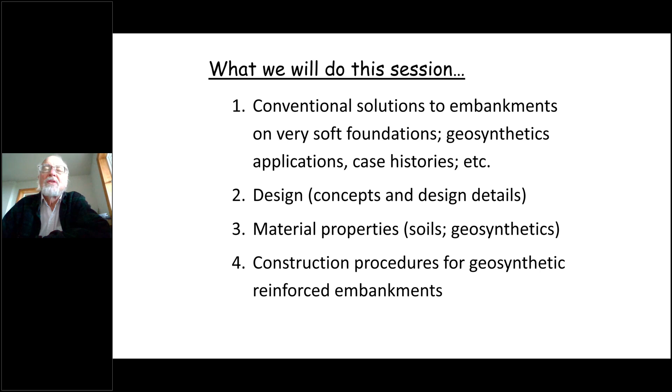We're talking about soft sites that you probably can't walk on - tidal estuaries, dredged retention disposal sites, very recent glacial deposits, and so on. They're all over the world. There are these very soft sites that somebody wants to build something across.

So what did people do historically? Well, in colonial North America, corduroy roads were quite common. The last one I can find was actually constructed in upstate New York in 1927. They cut the trees down, laid them out transverse to the center line, took the limbs off, built the embankment, and it worked beautifully.

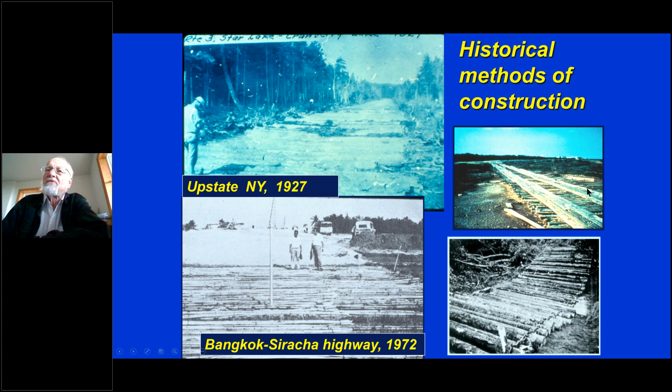These timber logs, or the bamboo poles used in Southeast Asia, all work to distribute the load, spread the load, and reduce the stress on the foundation. Contractors use timber logs or timber mats to walk equipment across soft sites, and plank roads have been used as well.

So conventional solutions are listed here. You can build a bridge. Now, sometimes that doesn't work. If you want to retain dredged spoils, a bridge won't work. Plus, bridges are expensive.

Berms and/or flatter slopes—that's often the case in highway engineering. The first thing engineers try to do is flatten the slope or use berms for an embankment on a soft site. That means you need right-of-way.

Lightweight fill, geofoam, expanded clay, lightweight glass materials—those are all possibilities. Up here in the Pacific Northwest, sawdust and wood chips have been used for a long time to reduce the weight of the embankment on the foundation.

Embankment piles are very common—what they call now pile-supported embankments. Embankment piles were used in Sweden for probably 50 or 60 years for approach embankments to bridges and for support of railways and highways across soft sites.

Excavation and displacement, or replacement with high quality granular fill, is a tried and true method. It's been around since the early days of highway construction in this country.

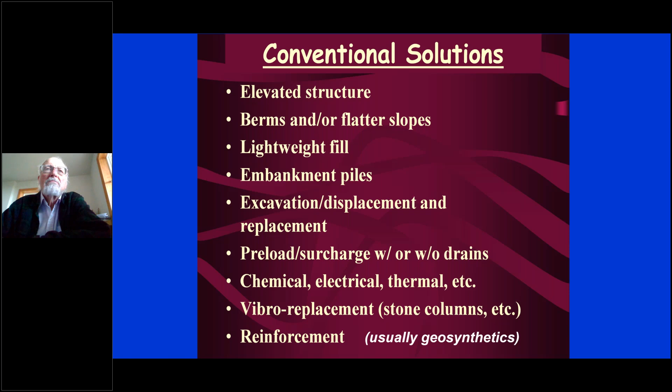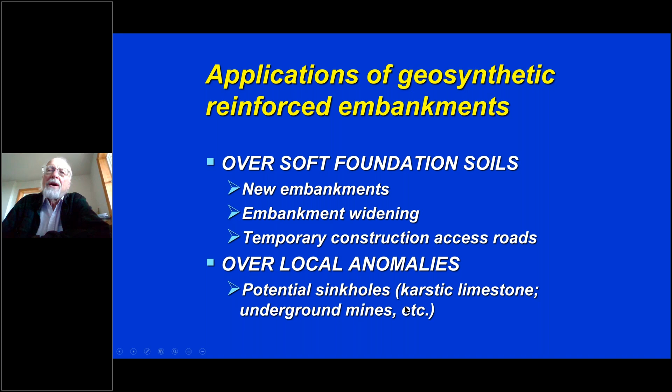And finally, reinforcement—today usually geosynthetics is what we use. Applications of geosynthetic reinforced embankments include new embankments, embankment widening, and temporary construction access roads. Sometimes, to even start construction, you have to reinforce your access road. And then there's use over local anomalies like sinkholes and underground mines.

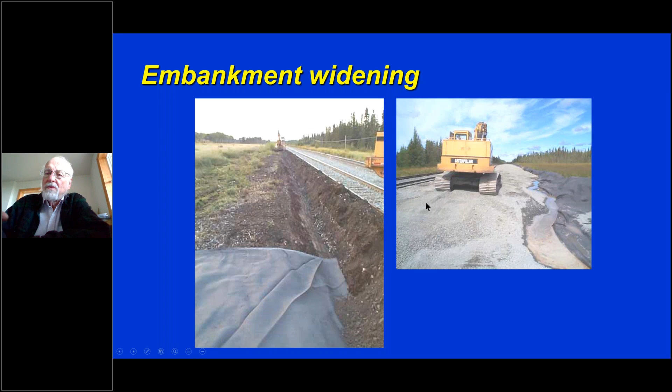Railways, when widening from a single to a double track system, can use geosynthetics very effectively under the new construction. You can see here the geosynthetic, the fill has been put in, and they're ready to lay the track. So what's the purpose of the reinforcement?

Well, it's to prevent instability. There's a little evidence that we may reduce excess vertical and horizontal deformation, but mostly it's to prevent instability. If you don't have a stability problem, you probably don't need a geosynthetic.

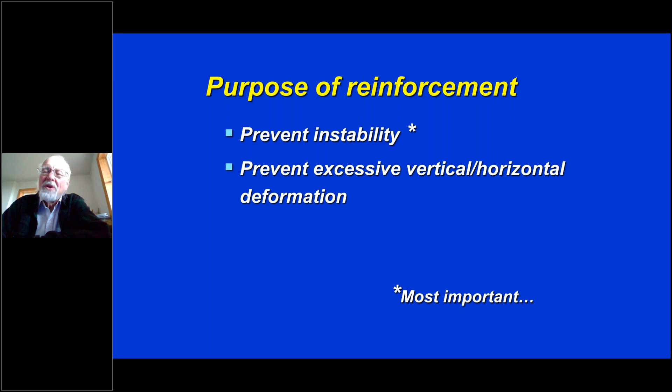Geosynthetics that are used are geotextiles—that's the granddaddy of all the reinforcing systems. Geogrids have been used in the last 25 or 30 years, and PVD drains for foundation soil improvement. Also in there are a lot of geotextile systems like geosynthetic encased columns and so on, which would be in this foundation soil improvement technology list.

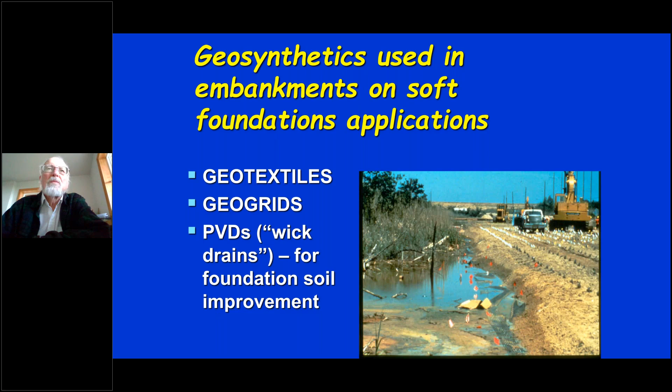Can you design with geosynthetics? Well, that's what we're going to look at now—the case histories that I talked about earlier and the lessons learned.

When they went to investigate the failure, they stuck a settlement gauge down the pipe that they'd put in under the embankment, and it was broken.

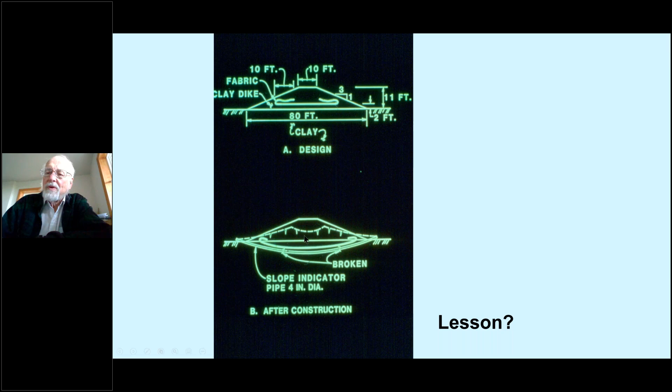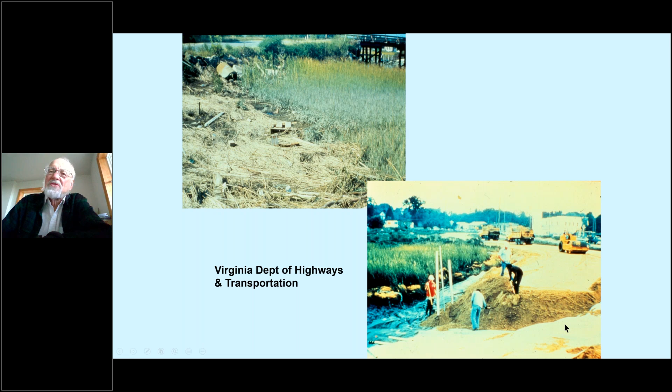Here's another case from the coastal west of Virginia. The Department of Highways was rebuilding this bridge, which had this kind of tidal flat area. You can see the construction here - here's the geotextile. This was back in the early days; they really didn't stretch it out very well, and the lift thickness was very large, but that's all right.

Unfortunately, they got a failure. This sketch below illustrates how it happened. The scarp here is vertical and then goes down. When they dug up the geotextile to see what happened, here's what they found - it had torn. So what did we learn there? It's got to be strong enough. That's the lesson.

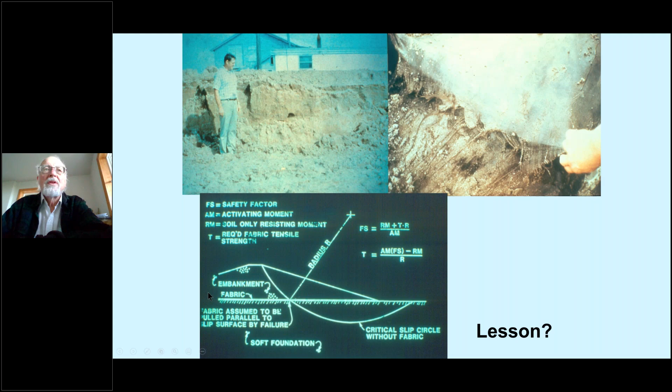We do this calculation and make sure we have sufficient strength in the geotextile at the base of the embankment to take up that calculated stress.

Here's another Corps of Engineers job somewhere in coastal Georgia. Three rolls of geotextile laid out - this is the easiest way to install it, as you can imagine. Go across the swamp in this direction. You can see the dozer blade here; they're already bringing in fill. Here's a roll this way, here's another roll out here in front, and then a third roll.

And yeah, it's a soft site. That's one reason they got the fabric - because they had the failure of that tractor. They came back Monday morning; all failures occur on weekends, of course. Here's the embankment that had settled into the soft soil, and here's a classical bearing capacity failure surface, a Prandtl failure surface.

The Corps of Engineers is great because they tell us what happened. Here's the original design - look at that, the 5-foot high embankment, nothing. And there are the 3 rolls of geosynthetics overlapped. When they went and dug down, this is what they found: they just separated. How much interface friction does a geotextile have? I don't care which one it is - in mud and water, not a lot. And of course, they just separated.

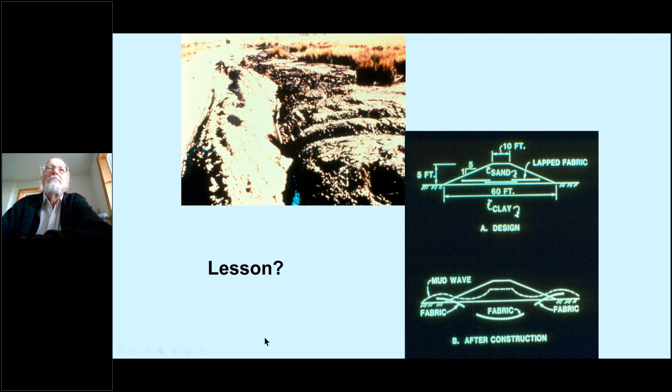Now, we learned to construct, again, from the U.S. Army Corps of Engineers at these two sites: Pinto Pass, Mobile Harbor, Alabama, and Craney Island, Virginia, and I'll show you a couple of photographs from there.

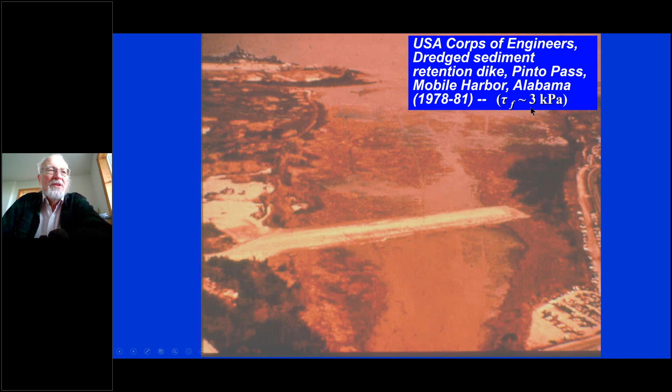This is an aerial photo of the Pinto Pass dike. This retention dike was built in the late 70s, as you can see. Four sections here eventually got to a height of 25 feet, starting out about 8 feet high, on material that you cannot walk on - I don't think you can walk on 3 kPa, about 60 psf material. You'll sink in up to your waist. So they managed to do it by very careful construction procedures that we'll talk about.

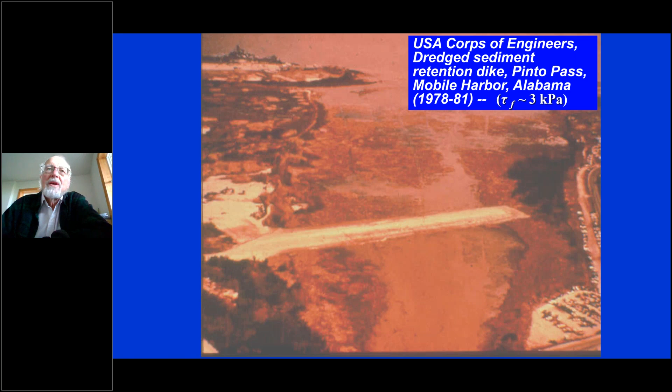Geosynthetic. The Army Corps found that before geosynthetics, when they started construction, they would dump in fill causing displacement - about 60 feet of fill to get 10 feet of embankment. When they started using geosynthetics, the ratio became about 1 to 1, 10 feet of fill and 10 feet of geosynthetic and soil.

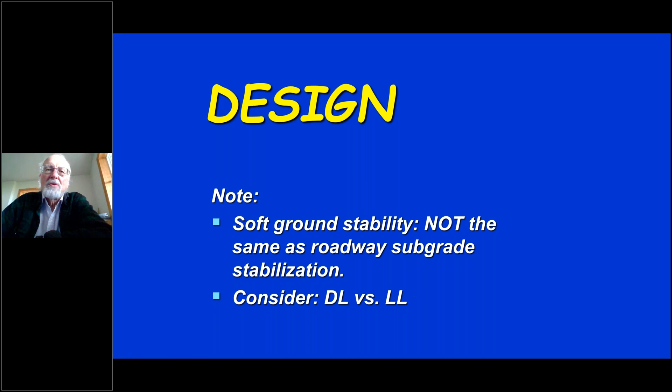In the early days of geosynthetics, these projects were often treated as if they were roads. Basically, the consideration is the dead load versus the live load. If you have trouble supporting your dead load of your embankment at a site, you've got a soft ground stability problem. If live load controls the performance and stability, then you've got a roadway problem.

If you have a limited depth to firm bottom, you may have a lateral squeeze problem or extrusion problem, and I'll show you a photo or slide that illustrates how to calculate that.

We could have rotational stability - that was the one from the Virginia Highway Department where that failure occurred. Lateral spreading is similar to the Hong Kong case that I showed you, so the frictional resistance along the base of the embankment is critical. And for very high embankments, you may have some stability problems in the embankment itself.

Serviceability limit states are due to settlement. Good old Terzaghi is working in these soft sites, and you're going to get a lot of consolidation settlement, and that could influence the performance of this structure, whatever you're building - a highway or a levee or whatever it is.

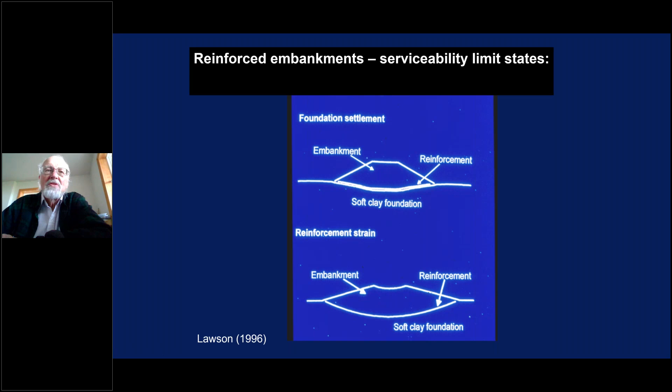And then we talked about the stretch, strain I guess it is, and deformation in the reinforcement at the base of the embankment. All of that has to be calculated.

So design steps are shown here. We've got these in the notes in Chapter 7, Section 3. 3.2 is what we call the cookbook - basically a list of these things: do this, do that, do this next. And if you do these projects frequently, you don't need to look at the commentary. The commentary is there if you have a particular problem, because we didn't want the cookbook getting so long with all these side issues, so we put those into this separate section.

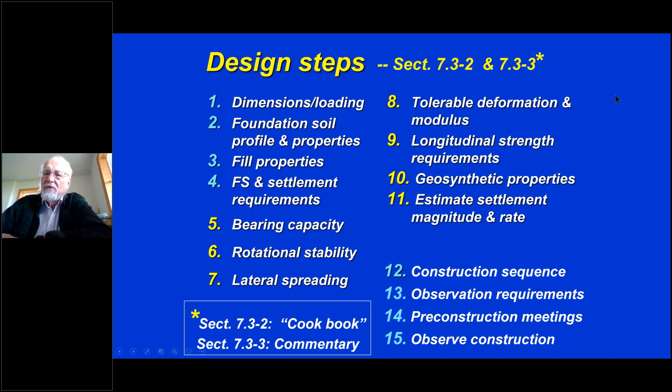7.3.3 has the commentary, and then there are these general factors down here that you have. We'll talk about that when we get to construction. So I'm going to just look at these - 5 through 11 are the

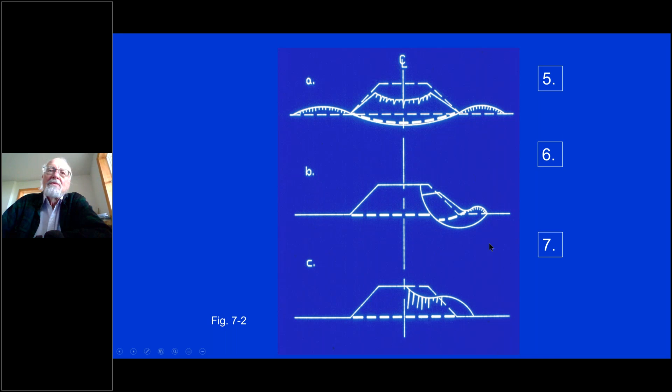critical analyses for reinforced embankment. Schematically 5, 6, and 7 are shown here: overall bearing capacity, remember the failure in an embankment, the rotational stability in Virginia, and the sliding in Hong Kong.

For overall bearing capacity, we use classical soil mechanics, foundation engineering for the ultimate bearing capacity of a shallow foundation. This is the classical Prandtl equation that was developed in the First World War. The allowable stress is the undrained shear strength, a bearing capacity factor depending on the shape and other factors that influence bearing capacity, divided by a factor of safety. That's the allowable stress, and that's gamma of the fill and the height of the fill - gamma H. It's classical soil mechanics.

A few comments: reinforcement does not increase the bearing capacity of the foundation soil, but reinforcement enhances the beneficial effects of these things - limited thickness of soft soil. If strength increases with depth, just reinforcement helps you. If there's a dry crust, which is very common in sedimentary deposits, especially in glacial areas, from seasonal dry periods, berms and or flatter slopes are enhanced by the use of geosynthetics.

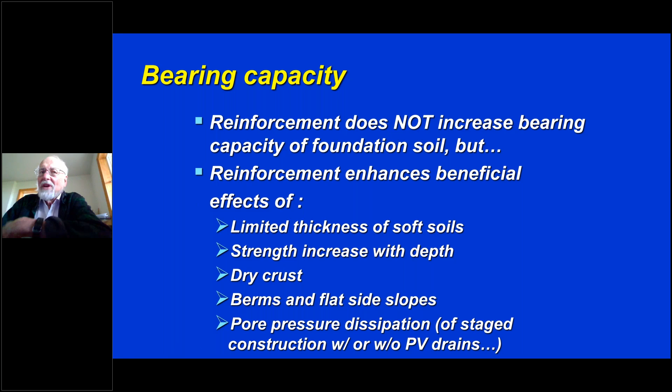And pore pressure dissipation if you have stage construction, with or without PV drains. So if you have any of those things going on, the reinforcement helps you a lot.

I had a PhD student, Dana Humphrey, who just retired as dean at the College of Engineering at the University of Maine. He did his thesis on embankments on soft foundations, with wonderful case histories back in the mid-80s. He plotted embankment height in meters versus average undrained shear strength, plotting all these stable and failure cases. This is essentially the bearing capacity line, a typical value.

And what we found is there's kind of an upper limit of reinforced, safe reinforced embankments that perform very well up to about this limit.

So a couple of examples. Let's say you have an average soft site with 10 kPa - that's really soft, about 200 psf. If you want to build a 2-meter high embankment there, you probably don't need a geosynthetic. However, if you wanted to build a 6-meter high embankment, forget it - no matter what you do and how strong the reinforcing is, it probably isn't going to work. So this gives you a first shot at whether you've got a chance for using reinforcing at your site.

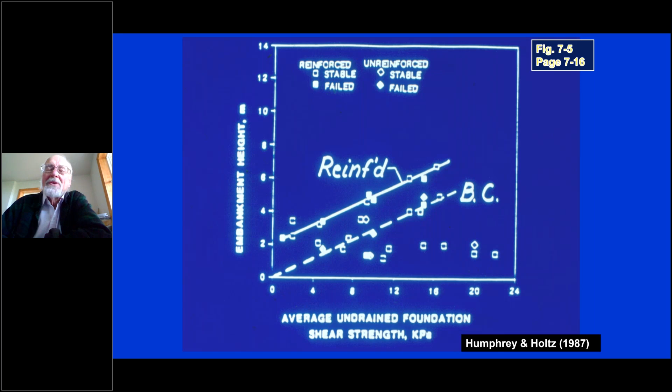Bearing capacity, I already talked about that. If you have limited depth to firm bottom, then you get a squeeze out at the toe, and plasticity theory is used for that solution. That's discussed in the commentary - there's a lot of additional information in there because this is a rather specialized case.

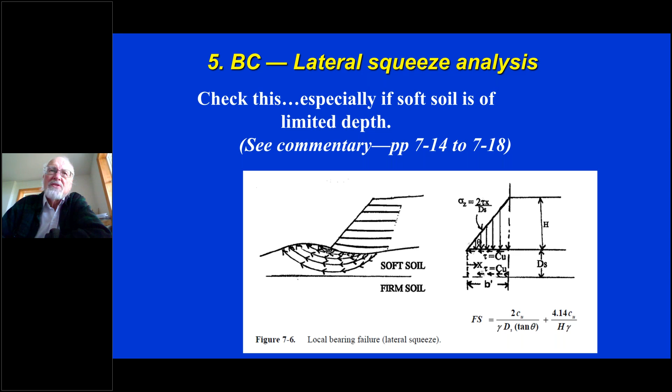We use berms or very flat slopes, as shown in this slide. So next is rotational stability.

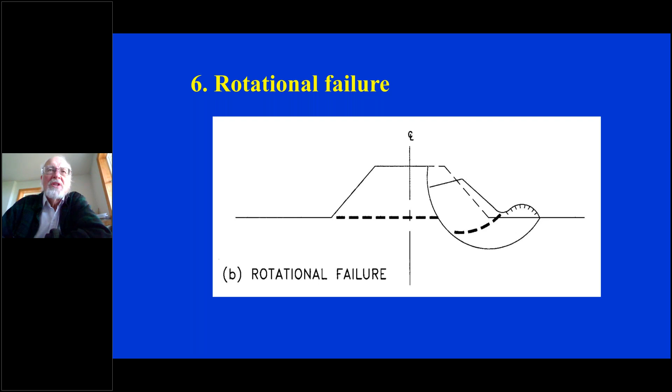I'm going to show you this one from a TRB paper that I wrote with a colleague from Sweden. He invented short sheet piles with a tie rod, which performs exactly like a geosynthetic at the base of this embankment. So the factor of safety is a simple moment equilibrium - the resistance provided by the shearing stresses along the potential failure surface versus the overturning moment.

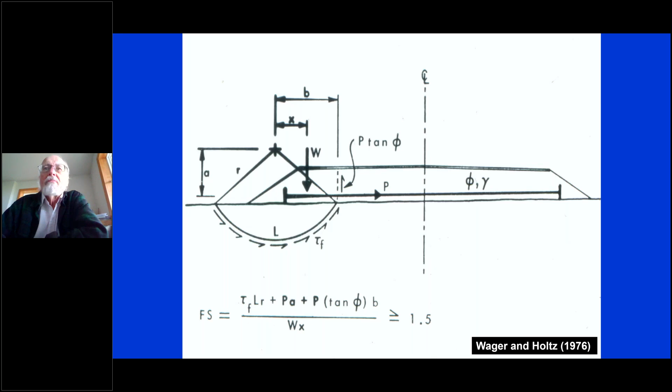And here are these two items, the effect of the reinforcing - that's the contribution that adds to the resistance. These forces causing failure are the same, but the resistance is provided by the geosynthetic. There's another example, figure 7-3, that shows a little more detail there.

I like this cartoon from Ground Engineering in Britain - this is probably 30 years ago or so. It says that if we can incorporate boundary elements, well, you can read it - statistical evaluation of parameter generation, and stick to the fuzzy sets, we can get accuracy to at least the fourth decimal.

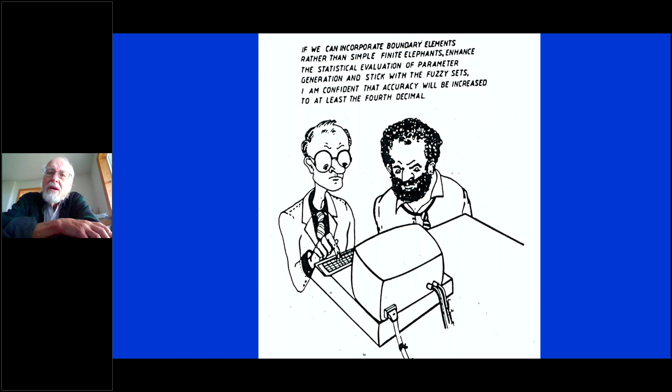Well, remember, the quality of your data depends on the quality of the geotechnical investigation. So here they are filling in those scores because that's what the engineers want, and they're just using - I don't know how you're ever going to use this result to calculate the stability.

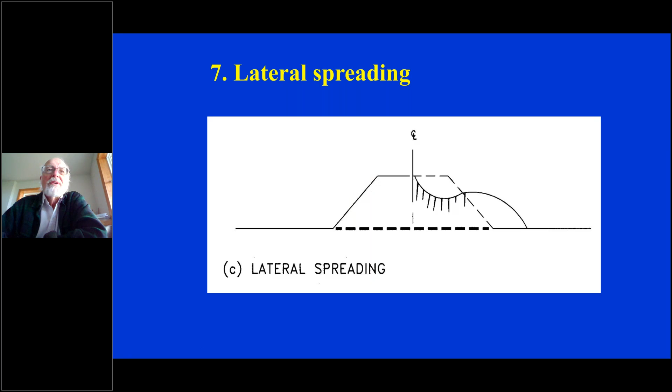Limiting deformation was the 8th item we have to worry about. These limits of geosynthetic strain have come about from field experience. For cohesionless soils, from the Corps of Engineers embankments, somewhere between 5 and 10%. If you limit it to that, it'll probably work okay.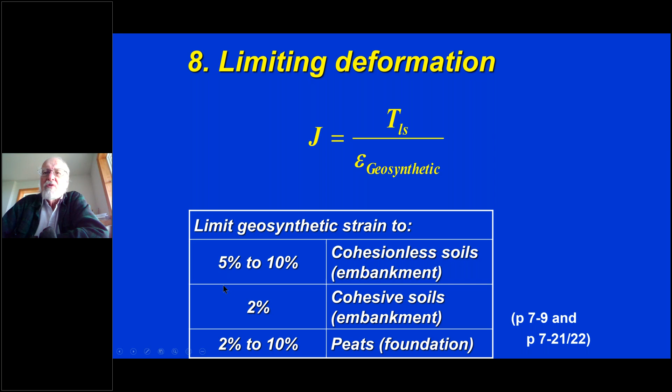If you have cohesive soils in your embankments, it could crack at fairly modest strains. And the Canadians have found on peat foundations, somewhere between 2 and 10% seems to work. This is just empirical observation, to keep the modulus of the geosynthetic stiff enough so that it's within these values for our particular job.

The Hong Kong case, lateral spreading, we talked about that. There's a new road, I think in upstate New York, that's already been repaired recently, and it's already cracking. So that movement is continuing.

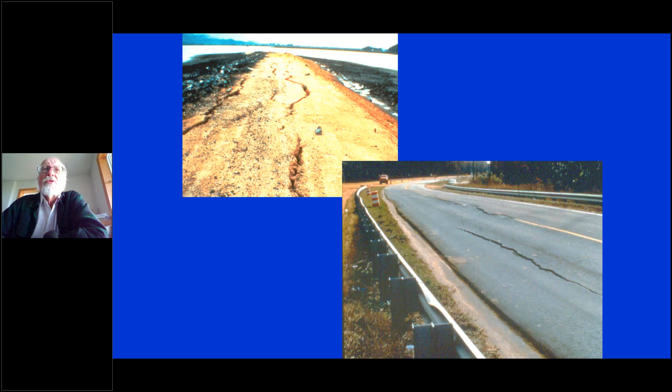Longitudinal strength requirements in the longitudinal direction - let me show you why that is. When we build these embankments, we cannot magically deposit all the fill clear across the whole embankment, so we're forced to build this in sections, and we put the geosynthetics down toe to toe, seam it in here. That's the seam strength that's really going to control, and then we build the thing in such a way that we keep the stresses constant.

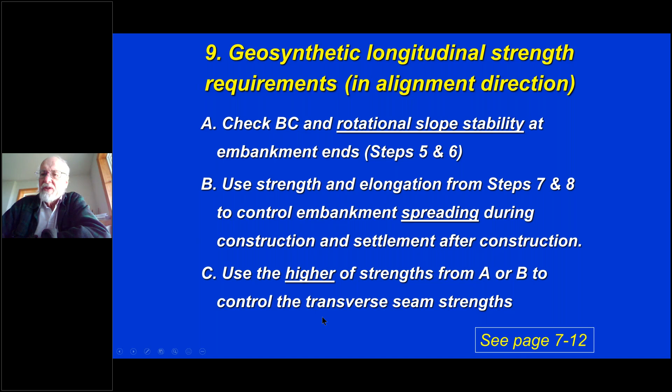So let me go back to that previous one. The strength of the transverse seams controls stability. So we check the bearing capacity and rotational stability at the embankment ends, going back to steps 5 and 6. We make sure that the strength and elongation from steps 7 and 8, to control embankment spreading, is okay. And then we choose the higher of the two strengths to control the transverse seam strength. That's very important.

So we check out the stability of these piles of sand, whatever you're using, to make sure that the seam strength is sufficient.

Factor of safety - if you calculate at your site for the embankment you anticipate building, and the factor of safety is slightly greater than 1, like 1.11 or 1.15, you say, yeah, it's probably okay. But your boss or your client wants you to have 1.5. How do you give them 1.5? You use a geosynthetic reinforcement at the base of the embankment, and you can, with confidence, tell them the factor of safety now is 1.5 or whatever they want.

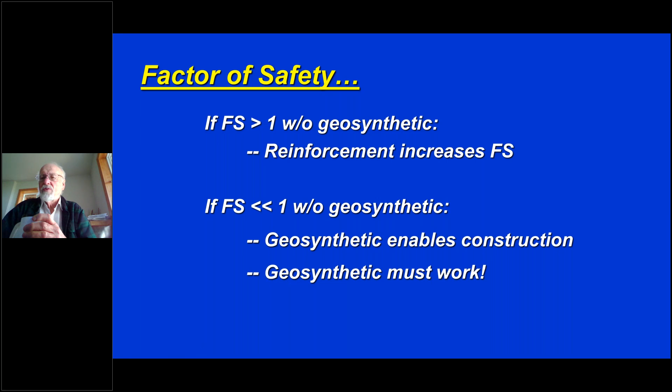If you make the calculation and find your factor of safety way, way less than 1 without the geosynthetic, you've got a problem. The geosynthetic enables that construction to take place. And I want to emphasize here, the geosynthetic must work - that's what we have to make sure, that it's strong enough and so on.

So are there any questions about design? Aaron? We do have two questions here, although I don't know if they're specifically related to design. I'll let you decide, you're the expert.

The first question is: will there be differential settlements between the reinforced zones and retained zones in a GRS built on soft soils? Probably - I think that depends on the construction process. For embankments, the geosynthetics goes toe to toe, as I just showed you in that last slide, so we don't have that issue of retained fill. You do in walls and slopes. So I don't know if that answers your question, but yes, I think you will have differential movement there between those two sections. That gets into the wall business, which is a little different than what we're talking about in this lecture.

There's another question: when should FEA be used versus conventional design methods described here? I guess it depends on how good your subsurface investigation and your laboratory testing are. If you have confidence that your properties are just the absolute best you can obtain, that you spend a lot of money on subsurface investigation, the highest quality piston samples, and high quality laboratory testing, then you can probably do a finite element analysis. The big problem I found with doing fancy finite element or finite difference analysis is that you get a lot of pretty pictures, and so you tend to believe that your answer is correct.

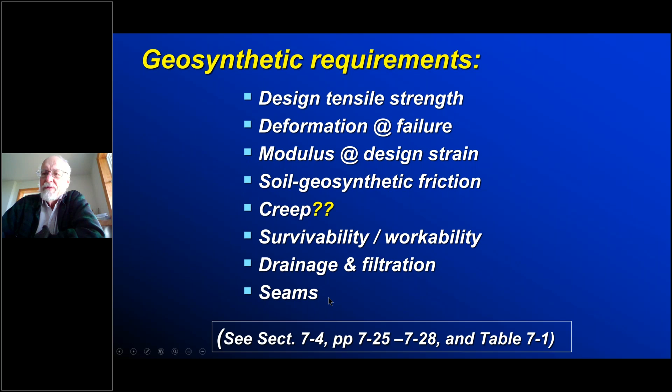So for tensile strength and modulus, we use the wide width test. Ideally, we'd like to determine this in soil, but practically speaking, we use ASTM 4595 or 6637 for geogrids.

This shows the wide width clamps in our lab, 4 by 8 inch or 100 by 200 millimeter specimen, to try to take into account the strain at the edge. It's not quite perfect, it'd be better if it was wider, but it's a practical thing, and that's why I said here practical.

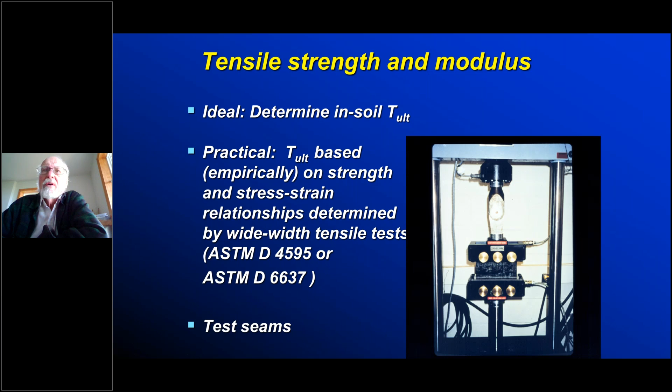That gives you a pretty good handle on the tensile strength of the geotextile. Note that many, especially woven geotextiles used in embankment reinforcement, often have different strengths in the machine direction versus the cross machine direction. You've got to make sure both directions are tested so you know what you have and that the geosynthetic can be put down correctly in the field.

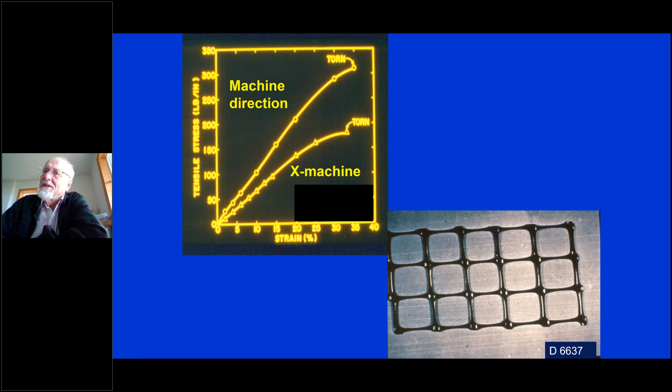And then I show this biaxial geogrid down here. It's not that easy to clamp those and get the correct tensile strength.

Direct shear tests, we use ASTM 5321, or pull-out 6706. They probably are okay, but the pull-out tests - I'm not real happy with the interpretation that's suggested in 6706 for pull-out tests.

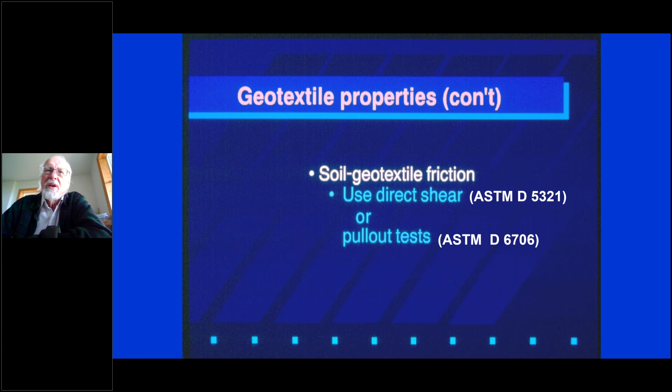So long-term creep, it's some kind of a secondary effect. If you have that problem, or think you have that problem, see the lecture given at the Rio Conference, Geo Americas 2020, last year, by Professor Kerry Rowe. He has measurements on these and tells you how to take care of this particular problem. But it's a rather specialized soil deposit - most of the time, in estuaries and the soft sites we've dealt with, you don't have problems with that.

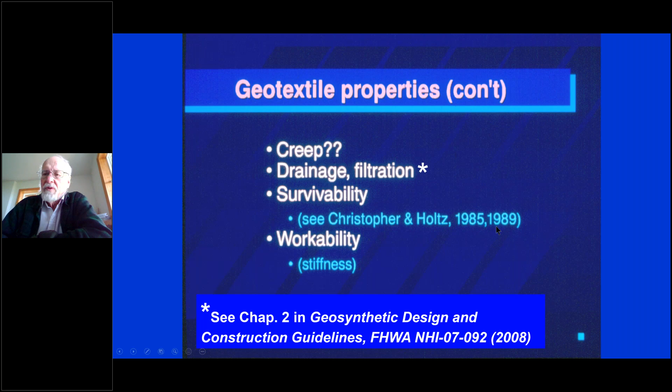Drainage and filtration, I'll refer you to chapter 2 in our manual for a very good, simple design procedure. Survivability and workability, I've referred to a couple of earlier Federal Highway publications. Settlement and creep - we're talking about the rate of settlement of the embankment versus the creep rate of geotextiles, and I've already mentioned Kerry Rowe's work on that. That's a very good reference.

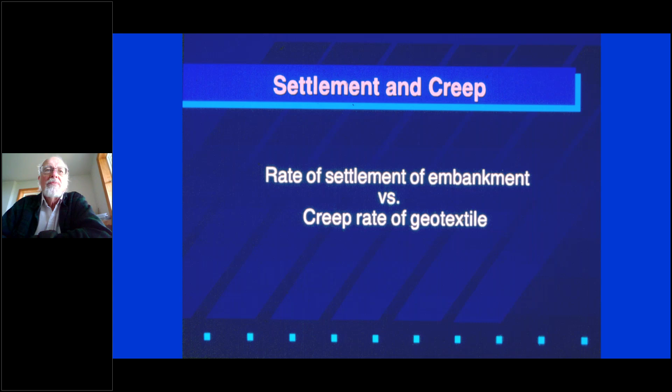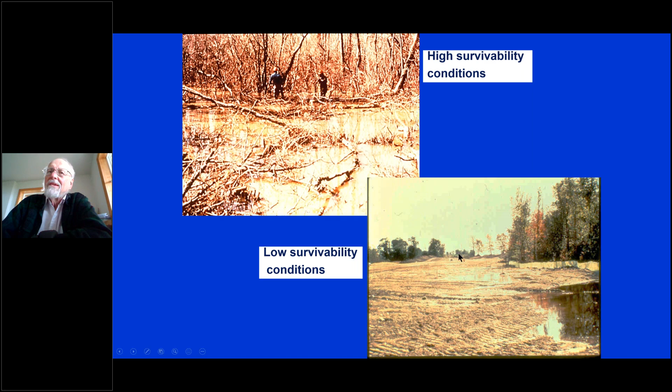If you get out to the site and you've got a working table like this and it's all ready for geosynthetic, the stresses that are active on that geosynthetic are rather modest. So it depends on the subgrade and equipment, the cover material and equipment, crushed rock or rounded sand, fine sand. Properties of the geosynthetics are shown in tables 7.4 and 7.5.

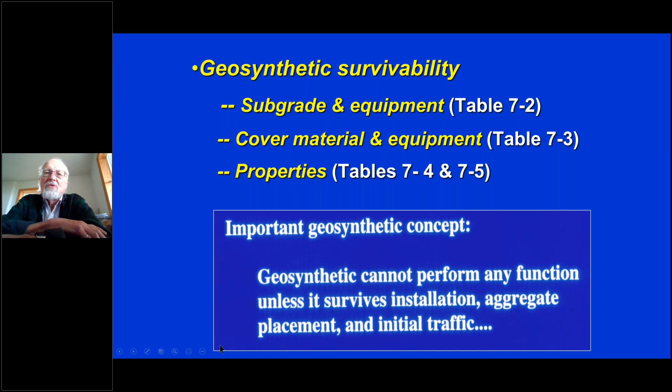I have put into this box down below an important geosynthetic concept. A geosynthetic cannot perform any function unless it survives installation, aggregate placement, and initial traffic. And I don't care if you're talking about a retaining structure, filter, erosion control, highway construction, or whatever. It's got to survive the initial installation, aggregate placement, and whatever the traffic is, including construction traffic.

We're lazy, and construction workers are just as lazy as we are. So I tell this dozer to kind of move this roll around. Well, look what that is doing to the first two, three, or four layers of geotextile. I can tell you it's not doing it any good. And the same thing here.

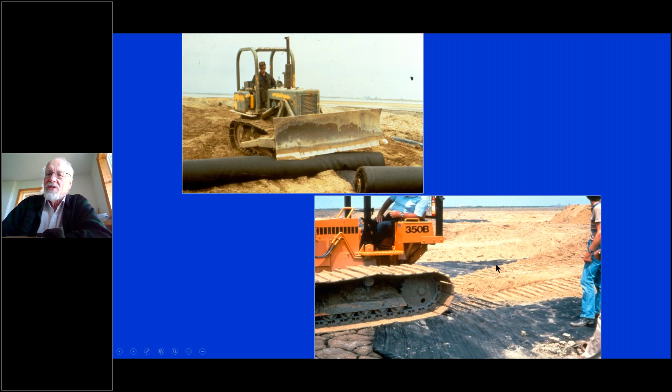Here the operator's looking down, and whoops. What's this guy doing? He's looking the other way. He's probably an inspector. If this is your representative out there on the site, he needs to tell the operator don't do that. And in fact, this is ruined. It should be in your specs that geotextile has to be taken up and disposed of at the contractor's expense.

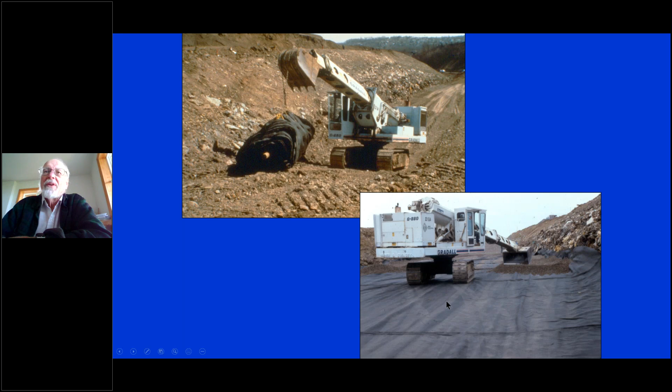And this one, look at this guy. He's driving right out on there. And here's a picture of him. You've got one, two, three, four, five, six, seven folks standing around, including the operator, and there's no reason why he can't spread his fill from the already placed material. If you see this happen, somebody here has to tell them, don't do that. That's not good.

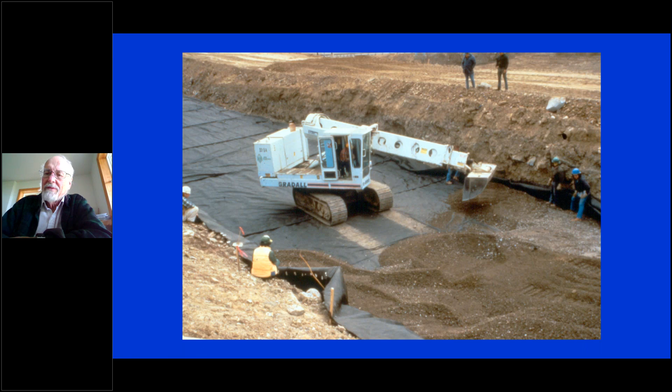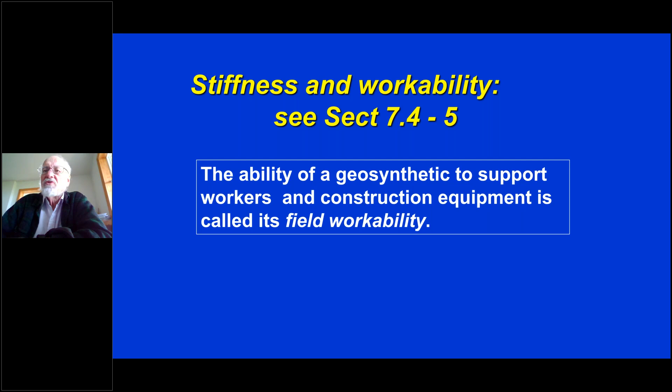Stiffness and workability is the ability of the geosynthetic to support workers and construction equipment, called its field workability. If you walk out on site and you can see the boot prints coming down here, this fabric is not stiff enough. It doesn't have very good field workability.

This guy's really struggling to get this fabric placed out on this soft site. Not very good. Or this is going to take up tension -- they're already placing fill, as you can see. And look at the condition of the subgrade here. It's terrible. So this is going to take a lot of strain before it starts to develop any tension in the geotextile.

This is a reinforcing job. This is not good. And similarly here, you can tell the stiffness of the geotextile.

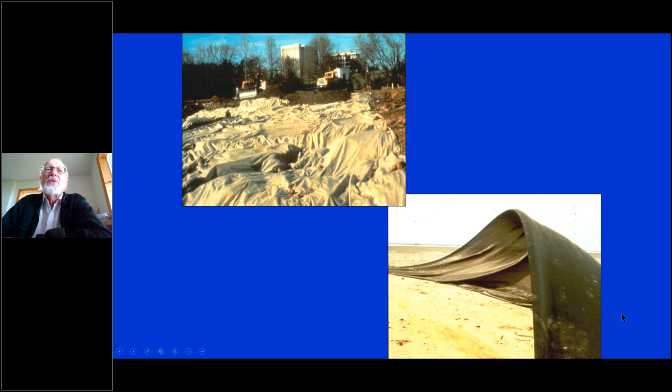So there's a design example in the chapter. This is one of Barry Christopher's projects. It's got a lot of detail in there. You can follow that. It follows the steps we've already talked about for design, and goes through the example to show you how to do it.

We've got specifications in there too, though I'm very reluctant to include those, for the simple reason that I don't want you copying them. I know most engineers hate to read specifications -- boring and so on -- and yet it's absolutely essential on these particular projects that you're thoroughly familiar with the specs. Don't just copy these verbatim. Some topics here are pretty good, and it's not a bad outline, but don't copy the specs verbatim out of this manual. I can tell you the contractors will have attorneys reading those specifications to find loopholes and places where they can claim extras or problems.

So any questions about soil and geosynthetic properties before we get into our final section?

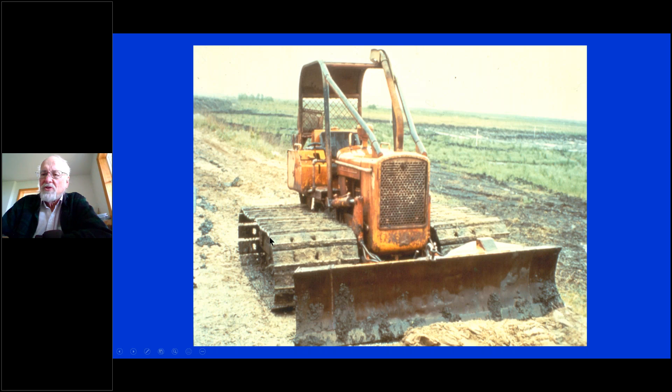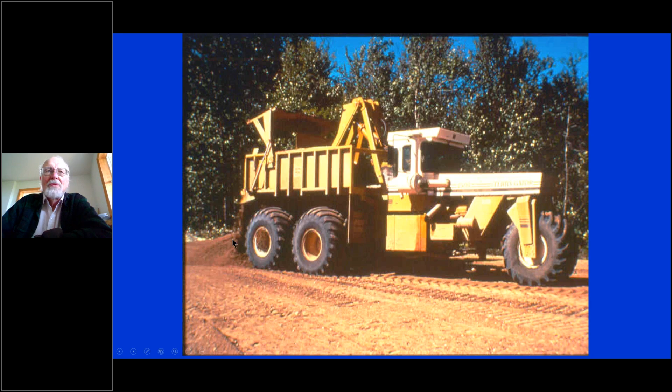One of Barry Christopher's jobs, the one with that case history, the contractors purchased this kind of equipment, which is used by farmers in the agriculture industry for depositing very thin lifts of fertilizer. It's got a gate on the back, and then this blade pushing the material out. You see these wheels are offset a bit - you've got a tricycle steering gear. This is used by farmers so that you don't compact the soil around the roads, and it's perfect for this kind of construction. You want a 15 or 18-inch lift. This thing can drive down the grade and push - they can control the lift thickness. It's very, very effective.

A working table is usually not necessary. If there's a dry crust, which often occurs, or a vegetated root mat at the surface of these sites, don't remove it. Highway engineers often want to take away all that organic material, excavate. Minnesota Highway Department, I worked there as a student, and they took out the top 3 feet routinely because it was organic or had roots and other vegetable matter in it, which would affect their highway. Well, we want to take advantage of those things. Don't remove the dry crust. Make sure the root mat, the vegetation remains, because it is a little bit of extra insurance for your project.

Use a high survivability geosynthetic instead of a working table. Usually that's not a problem, but just make sure. A geosynthetic reinforced access road may be required. Bringing the fill in on the access road has several advantages, but if you have a very soft site, you may have to have reinforcement on those access roads as well as for the main embankment.

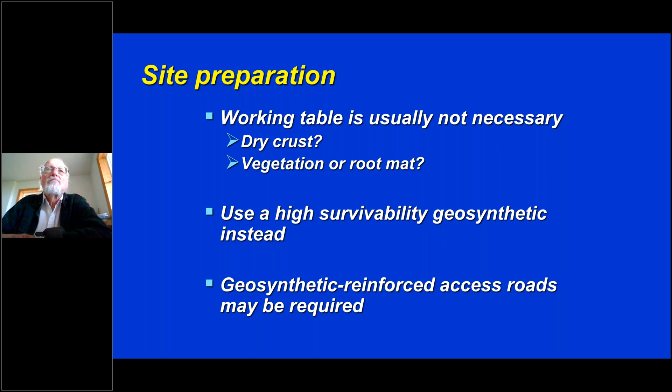Placing the geosynthetic, you want to make sure you connect all seams. If geotextiles, you have to sew them, and if geogrids, you use bodkin joints. We have tried for 30 years to find a way to connect geotextiles without damaging the geotextile itself and reducing the strength. The seams are always weaker than the intact material, because sewing breaks threads and punches holes in the material. With geogrids, you have to use bodkin joints, and I'll show you some cartoons of those.

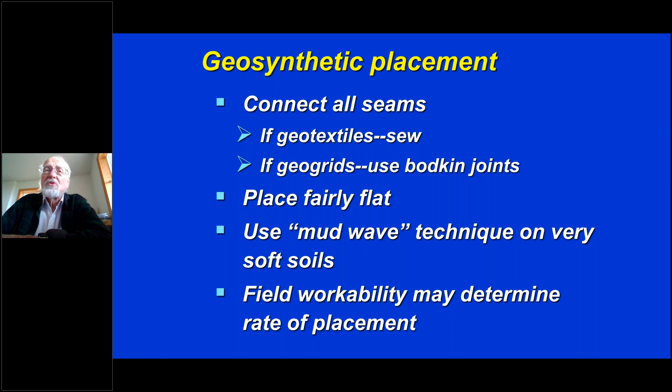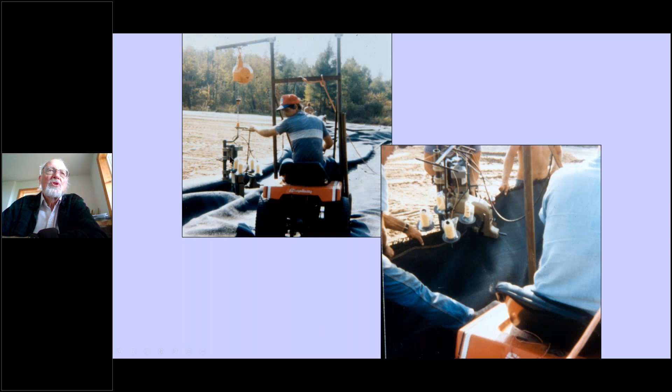Here's sewing with handheld sewing machines. It's a modest amount of sewing, that works fine, but it's kind of hard work. A lot of times, especially with heavier sewing machines, they use a winch on a little golf cart kind of thing to transport it. These are heavy machines, it's hard work, and you do need people there to provide it.

Here's the sewer, here's the driver, and two guys holding the geotextile getting ready to sew it. You probably don't need all of these people sewing, but here's the sewer, this is a helper, there's a helper. One of these people needs to be the inspector, who takes a ballpoint pen or an awl and inspects every seam. You want to make sure every seam is inspected. When the machine is right here, the inspector checks out here and finds the missed stitch. It's easy when the equipment is still here to go back and re-sew that.

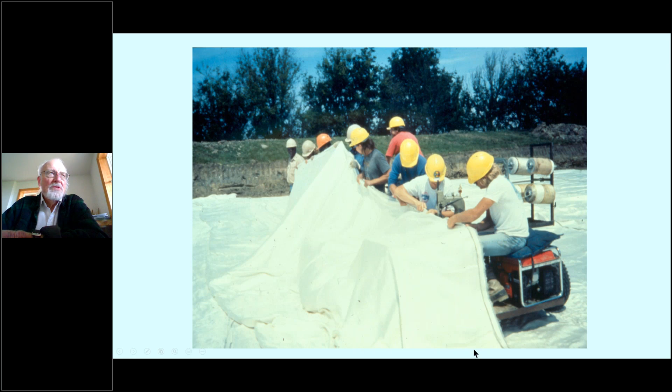Here is a site, not sure where this was, but the geosynthetic was sewn off-site and then deployed. As you can see, they're bringing it out here on a work table. Here's one seam up and then two seams down, one seam up, two seams down, so it had it folded in such a way that some of the seams were down. Somehow, one of the down seams was found, and notice that the seam is down. How did that happen? That was really dumb luck. I'm surprised the contractor didn't cover that up real fast.

And that's the problem with having seams down, they can't inspect or repair them. How do you repair this? You have to pull all this geosynthetic up and try to sew a patch on here. It can be very difficult, very costly, very expensive. Don't let that happen, so inspect all stitches.

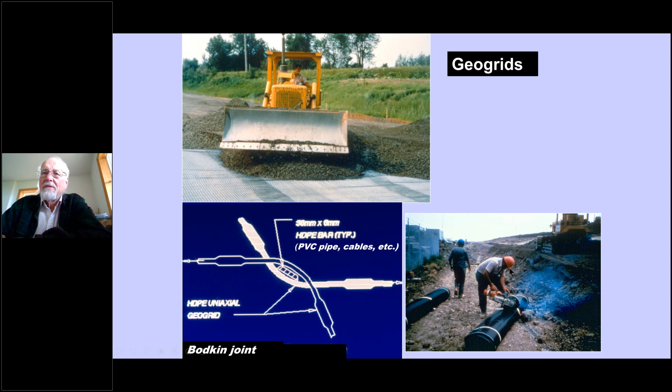So you have to use a bodkin joint, a bar like this, an HDPE bar, PVC pipe, cables, electrical clamps. There are all sorts of techniques that have been used to clamp these two layers together, woven through the openings in the geogrid. And if you need to trim the length of the rolls, make sure this guy is wearing safety glasses, since a lot of hot plastic flies around.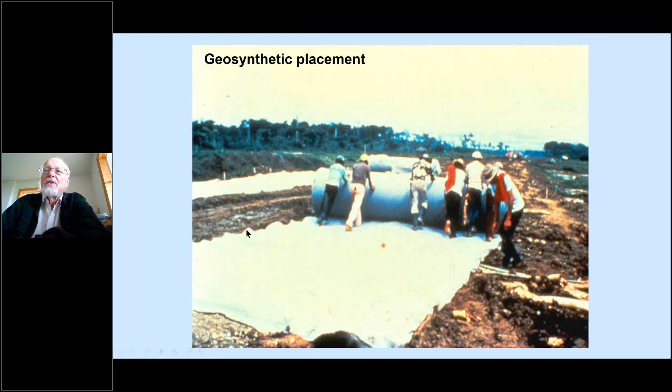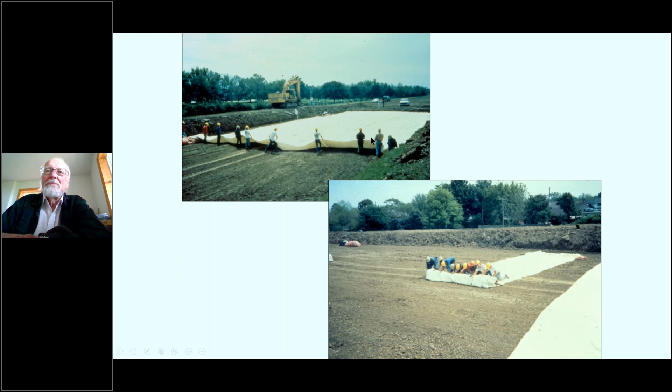Geosynthetic placement: in this case, they're rolling it down along the center line rather than transverse. That's fine if you seam here in the center line, or the deformations are far too small. You may need a lot of people pulling out the geotextile and deploying it, but I don't think you need this. I don't understand how they even could do this—it's a little silly, it seems to me, but this may be necessary, and that's fine.

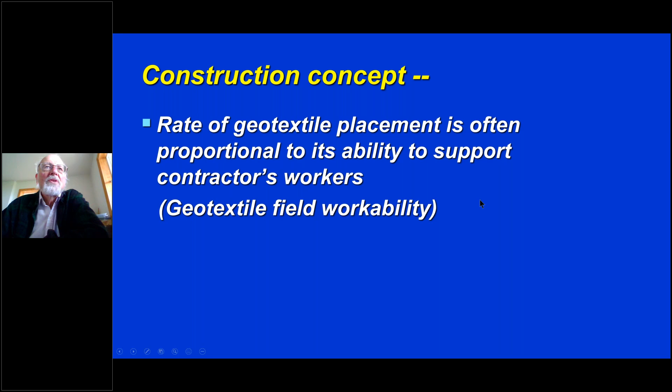Now, the rate of geotextile placement depends on its ability to support the workers. That's what we call the workability or stiffness of the geotextile. I showed you that one earlier.

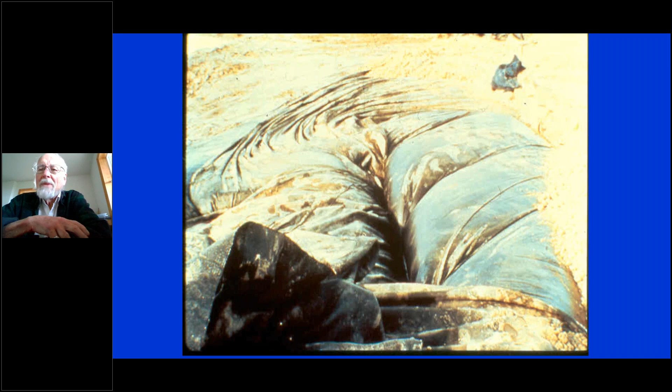Lost an inspector here, right down to the bottom. Well, actually, what happened—you can see the fill being brought in here. It was a test: they told the driver not more than 3 feet of fill. And of course, he pulls the lever on his dump truck, and it goes up, and it's a pile about 7 feet high, I'm told. I was standing there for about 30 seconds, and then right down to the bottom. Don't let that happen to you.

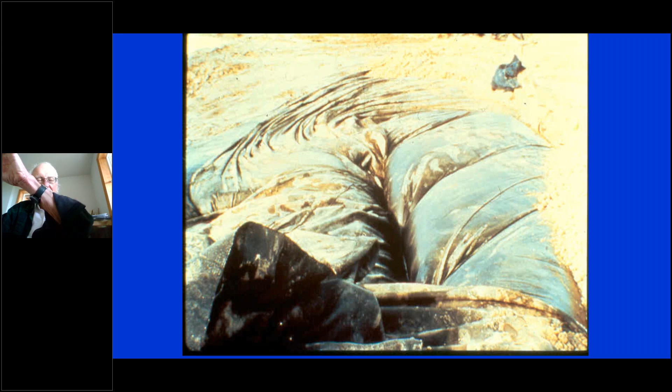If you want, one of the things you can do—and I'll show you that—is place off on already placed soil fill, and then bring it in with equipment. So for placement and compaction of the fill, use low ground pressure equipment. I already showed you photographs of that.

Use cohesionless fill, at least for the first few lifts. If you have a problem getting cohesionless fill and you want to pay for a lot, maybe the first 2, 3, or 4 feet of fill would be cohesionless to permit easier construction and reduce the stresses on the geosynthetic. Then you can build the rest of the embankment out of whatever you want later.

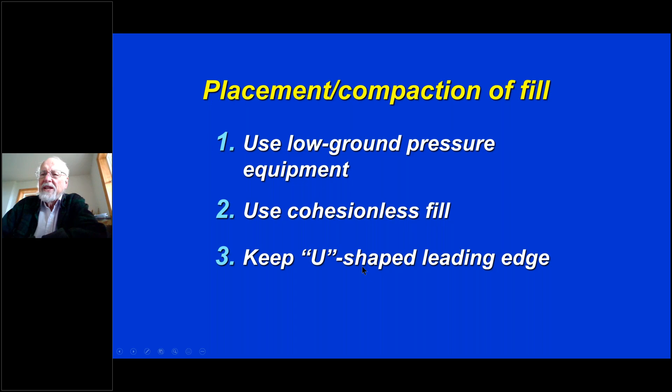But there are ways we can address this. Instead of building in conventional layers, you build it in sections. You have the geotextile at the bottom, and these access roads over here to anchor and stretch it, which can then be used for bringing fill in to fill the sections. You see what that's doing—it's keeping the stress on the geotextile the same while building the embankment the rest of the way up.

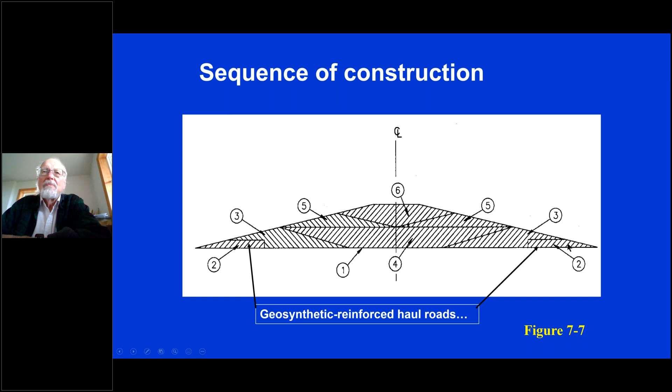So the geosynthetic-reinforced haul roads are here at the edge, and this is what I talked about, the U-shaped leading edge—let me go back here. Dump the fill on already placed fill. The dozer operator keeps these two arms at the same elevation and the same distance, and if he does it right, it stretches the geotextile, putting it into tension. This is the direction of construction, so you fill this in very gradually and very carefully.

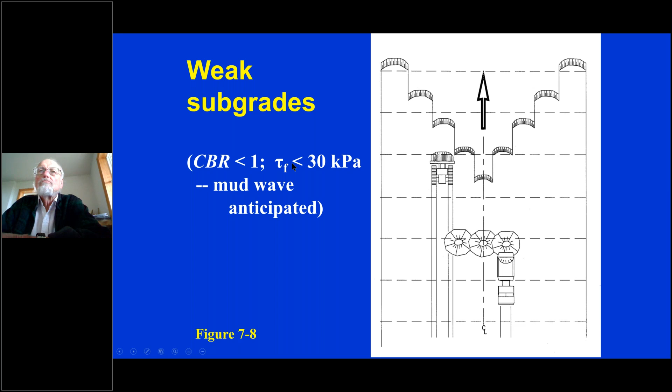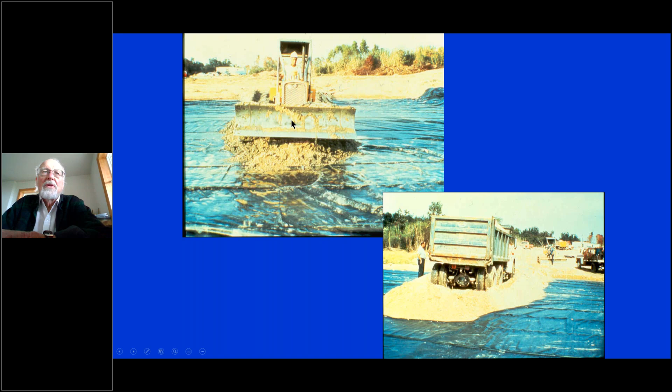There's no reason why you can't put them to work. You dump out here, the drivers have here—these guys should be put to work spreading the fill, like it's shown here. Same thing here: this truck is too full, and he got stuck on the sand, and you've got this dozer and this dozer here—put them to work. And here they are going out, just starting out, so they're having trouble getting this into tension, but they'll figure it out.

Here's one arm of the U, the other arm of the U—you can see the mud wave developing here. Do that carefully and in balanced construction, and it will tension the fabric.

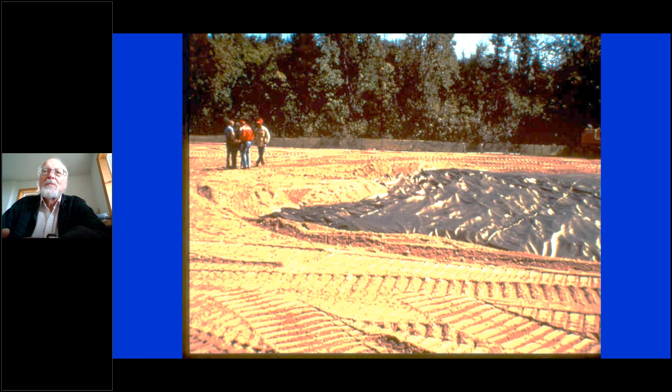And clearly the soils are stronger and maybe shallower. The mud is getting thinner and thinner, and that's what happens. So just reverse the U.

So now the bottom of the U is this way, and the arms are down here, and that'll stretch so those wrinkles will be pulled out in advance of construction. So this will stretch that out if it's done properly.

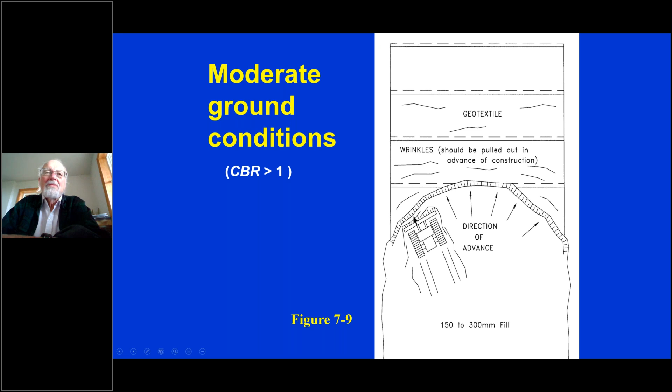And my experience with dozer operators is that they love to do a good job. So I would tell them what you want, show them what you want, make sketches, make sure they understand, and they'll do a good job for you.